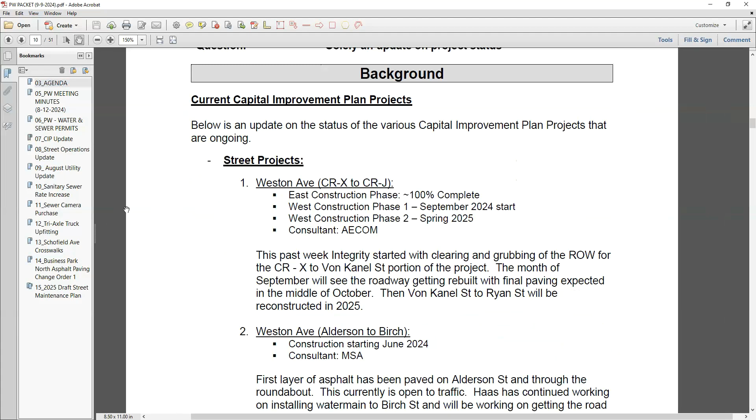Thank you. The staff report, item 7, CIP update. Michael? I'll try to keep it somewhat brief. The Weston Ave Village Project from X to Von Kanel is underway. Integrity Grading, their subcontractor, started the tree clearing and grubbing last week. They'll continue that this week, with probably some pavement removal starting towards the end of this week. So that half mile from Von Kanel to X will be done this year, and the rest of the way from Von Kanel to Ryan will be a 2025 project.

Weston Ave, Alderson Street to Birch - that should be completed. He's going to do everything there: pavement, final pavement, striping, everything. There's no water and sewer work there, so it's really just rebuilding the road and regrading the ditches. The schedule for next year's project is as soon as snow melts, they'll get going right away - that's according to what they have, the whole season, for the most part, and it's a fairly good stretch.

Then the joint project with Rothschild - Tom mentioned the water mains nearly tied in at Birch Street. Road building is ongoing there between Alderson and Birch. Looks like WPS has some work to get a new gas main in. Is that starting next week? I talked to him today, actually - they'll be in on Thursday, it started. So Haas is pulling out their pipe crew today, and their grading crew is coming in tomorrow morning, and they're just going to keep working on the road here. WPS should start on the west side and then work their way to the east.

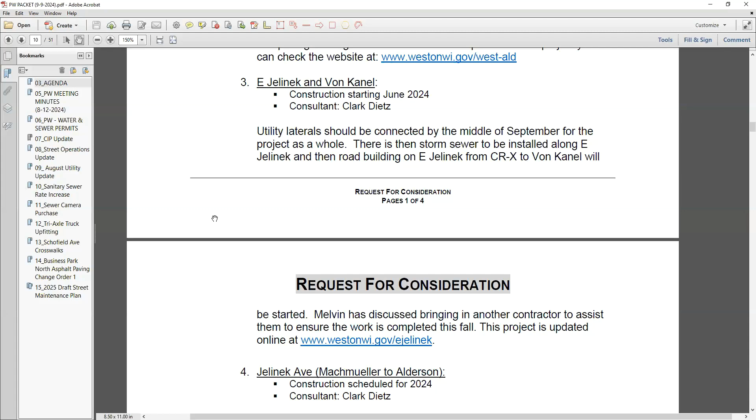East Jelinek, Von Kanel - that one's ongoing. Water mains in, sewers in, lateral connections are progressing from X heading east towards Kirk Street. Melvin will be subcontracting some of the storm sewer installs to McCabe Construction, and they're slated to be in here later this week to start the storm sewer. They're getting some additional help to get that project to the finish line before winter hits. The regular Jelinek that's paved has a few restoration items we're following up on, but for the most part that one's done.

We're getting close to 60% plans for Schofield Ave. Right now we're looking at an asphalt roadway going in and removing the concrete. There's an agenda item on the docket for today to discuss some of the location of pedestrian crossings - we'll talk about that one when we get to it in a little more detail.

What's the schedule for this project, Schofield Ave? Construction starts next year. We're looking to bid it in February, March, so the contractor can get going right away - probably March of next year, this coming year. So this winter we'd finalize plans and bid it right away, so that as soon as weather permits, we can get started on it.

I guess Fuller Street would be in the same boat. So we've got some preliminary design going on with Becker Hoppy. Ike's working on some of the stormwater aspect, and we hope to have, probably middle of next month, our public information meeting with the neighborhood on that one.

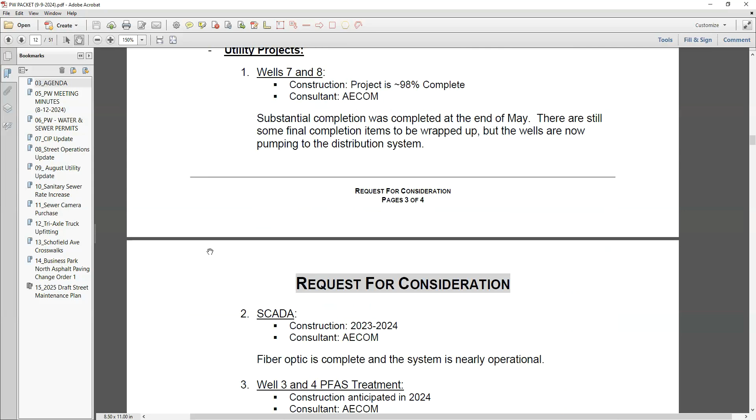So you said you use the water - we use the water right now. Correct, well 8 is running and we're using the water from it. Do you know how many gallons a day we use from that well? I don't, well, here, it's in your report. It's 6.8 million for the month of August.

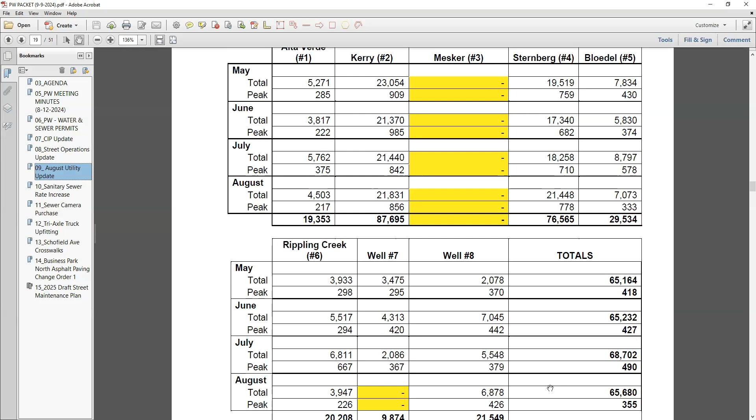And it's still good quality, what we find there in the design, so pretty much equal to what Bloedel Well is putting out, except for that downtime in July.

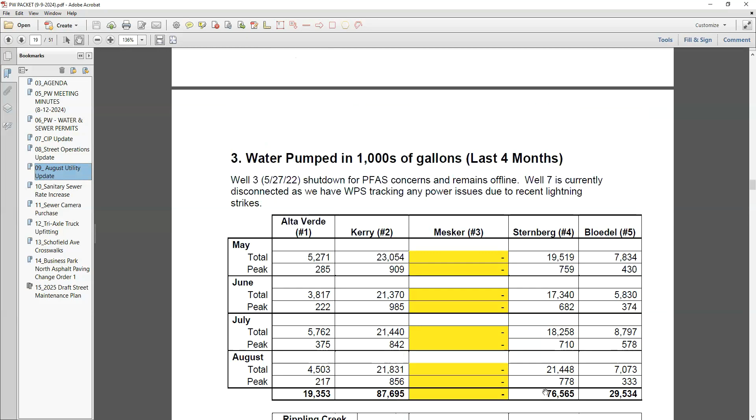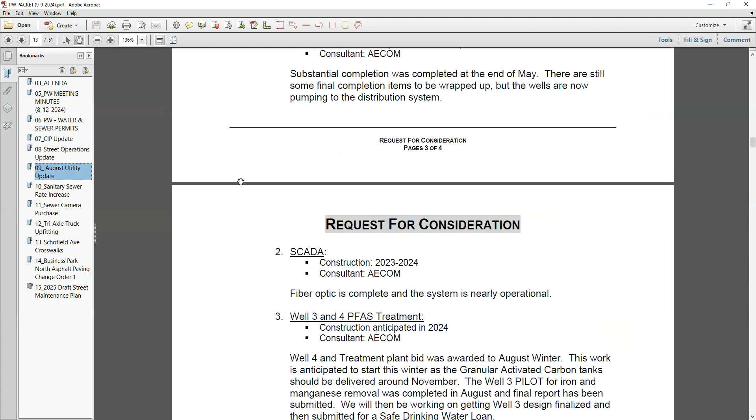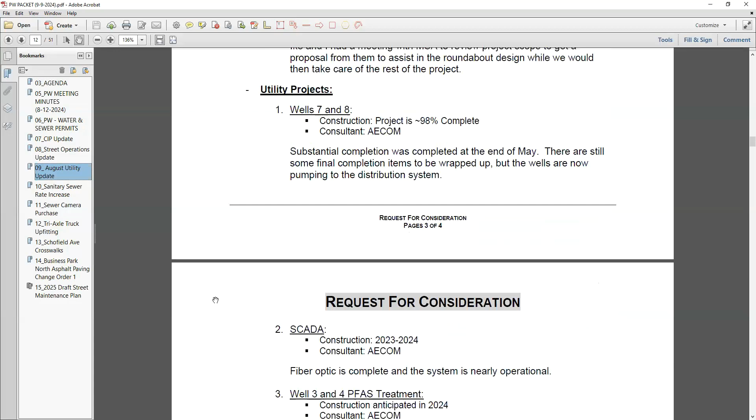Okay, is there anything else, Michael? Who's gonna talk about the wells and the PFAS? Are you handling that, Josh? Oh, the PFAS, yeah.

I guess I can. Well 4 treatment plant work, the granular activated carbon tanks should be delivered around Thanksgiving, is what we were told last week, so once they're here we can get going on that. And then the well 3 pilot for iron and manganese was completed, final report submitted, so now we can get going on our safe drinking water loan for well 3, since we have that information back and can justify to the DNR why that part of the project should be included with the emerging contaminants funding.

Ryan Street, that station? Yeah, we just have some site work left on the village side to finish up there, but the contractors are done. So later this month we should be getting Ryan Street graded and paved, and then Trotzer's getting some landscaping put in for screening from the neighboring properties.

Okay, and then Cedar Creek Interceptor, that's a lifetime project. I met with Catherine from MSA earlier today. We're still - Weston Ave is our number one priority for right of way, and that's kind of been the focus for the past year or so. We got another half mile, or quarter mile, of right of way taken care of this morning with a property owner, and hopefully we're nearing the end of the Weston Ave right of way, and we can then shift gears to working on this project. Any questions for Michael? You're gonna get later on.

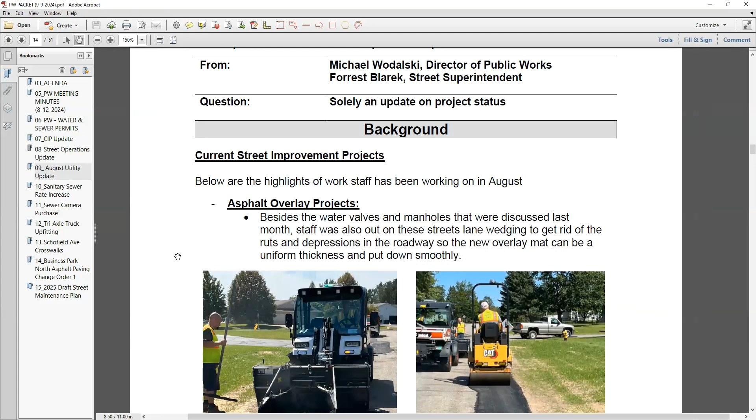Forrest street operation update. Item 8.

You don't have to follow along. You can just say whatever you feel like.

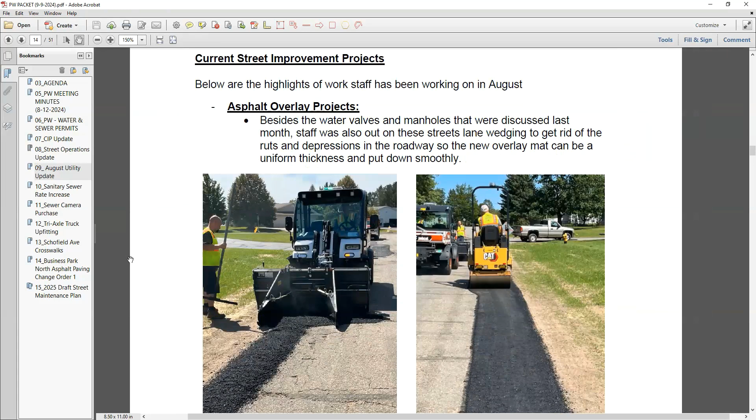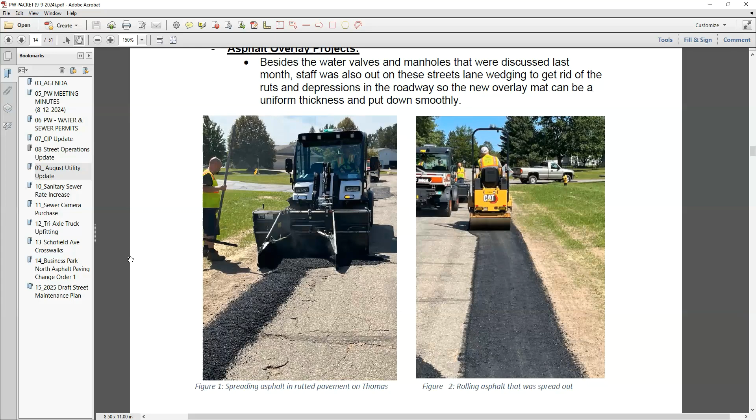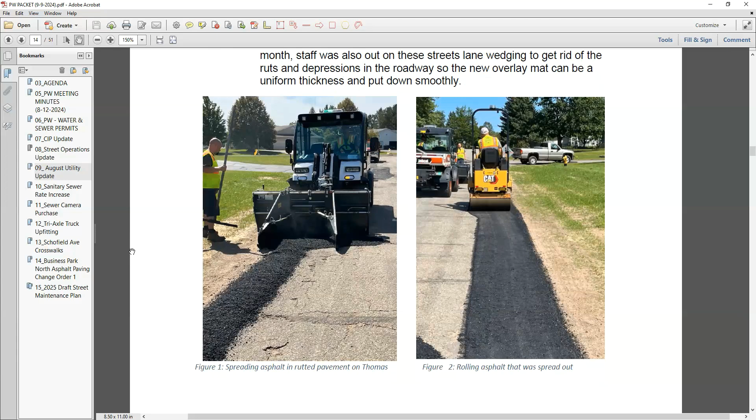Going ahead and putting the overlays that we had coming up from the neighborhoods listed. We got all our work done, we're waiting on RC Hayward to come in. They finished today in the Chadwick, Thomas County area, got the overlays done there. Tomorrow they're starting on their overlay project, then moving out to the Country Creek, Siberian area.

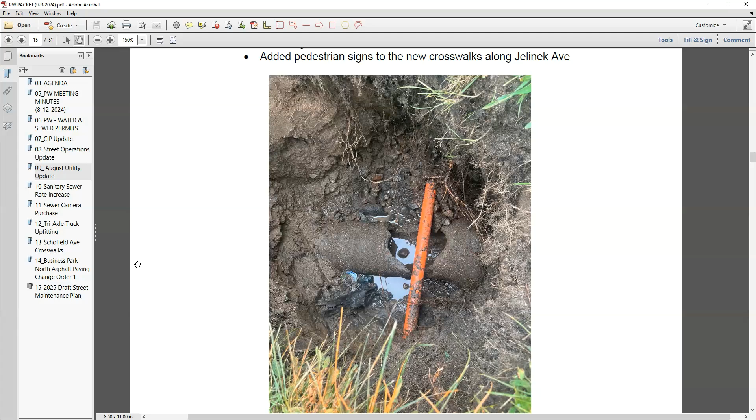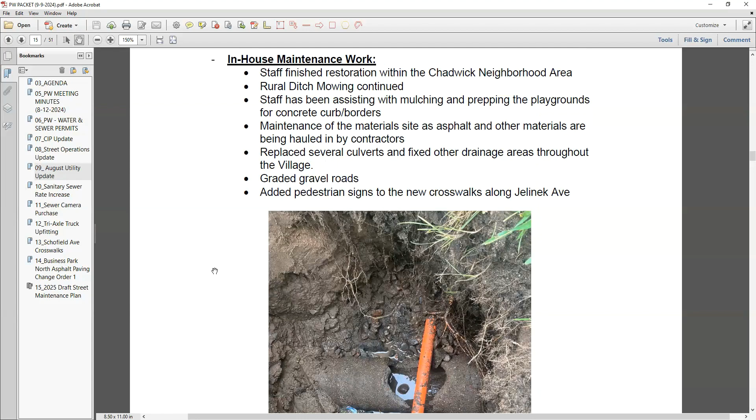This was an interesting one. I think anytime it rained, all of a sudden there was like a little geyser popping up through this person's front yard. So what is this pipe? That's a 4-inch pipe, what is it? That's a 6-inch, looked like an old storm sewer pipe. Don't know exactly where it starts from. It runs through this person's yard, but it connects into our storm sewer. So it must have been an old storm sewer in that area, up in Normandy foothill. So it's coming down the hill. I couldn't find where the inlet was on it, but every time it rained, that thing would fill up and just boil out of the ground.

So there's no wastewater in this place? No, that's for sure. So I see you repaired this, just have it there for that rainwater? Yeah, it's connected into our storm sewer. That's disconnected, yes correct. The TDS line is running parallel to our storm sewer, so this is perpendicular to it, almost at a T.

We had one of our crew members who formerly worked for County Materials concrete. He kind of came up with the repair solution on this one, using some wire mesh and almost rebuilding the pipe in place. It's nice having people with varied experiences being like, hey, I know what we can do here. So did he put rebar across and wrap the wire mesh around it? The wire mesh is wrapped around the actual pipe, then concrete over the top of the wire mesh. There is no rebar, no reason for it.

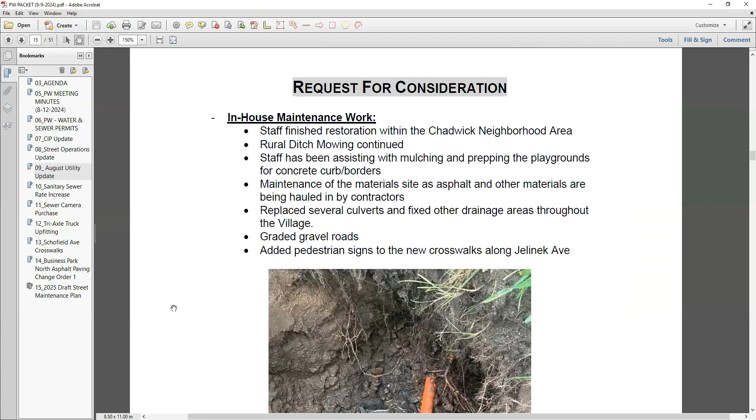All right, item 9, utility operation update, Josh.

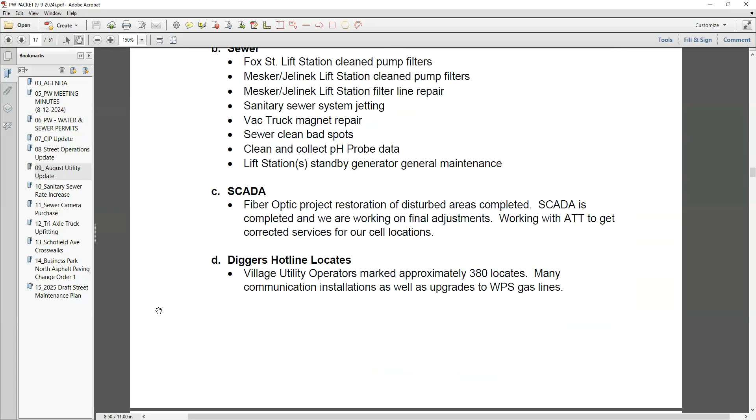Yeah, water side of things, a handful of kind of miscellaneous well repairs on some pumps and leaks. Michael touched on our iron manganese pilot study. I think we owe a meeting with Brian and the boys over at Water Surplus. We were supposed to do it last week, but we'll meet with them to discuss findings.

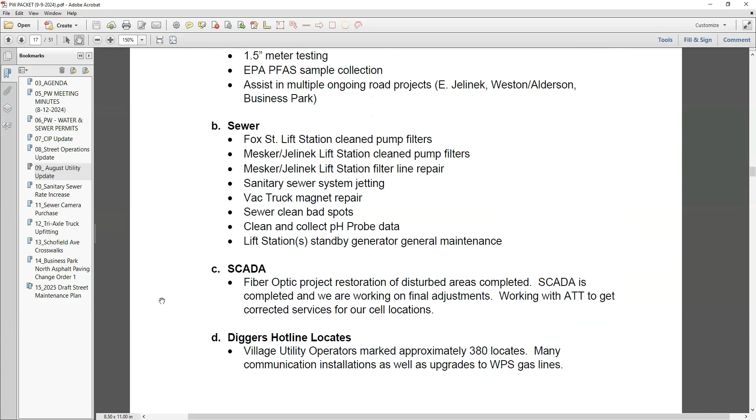We drained down and cleaned one of our towers over in the business park. Currently doing some measurements for our retrofit hydrants to get some of our 2 nozzles retrofitted to 3 nozzles. Completing some of our larger meter testing, continuing with some EPA PFAS sampling. Michael touched on most of the road projects that we have going on.

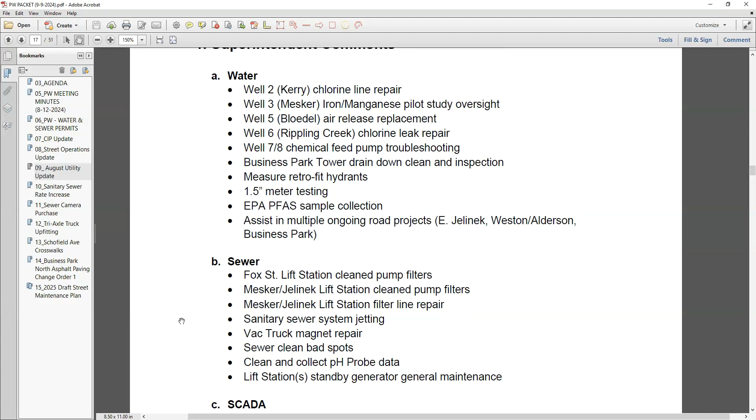Sewer side, some lift station cleaning, some general maintenance items. Sewer jetting is still going, hopefully approaching the end of that stuff. A couple other repairs as part of that cleaning for the Vac truck. Got up to some of our bad spots, continuing some pH probe data collection.

Fiber optic, our SCADA system, we're making some progress I think with our remote sites that use our AT&T. Apparently at the outset it wasn't set up with the correct business account, so then they had to reorder our SIM cards. We had to get new SIM cards, they had to build a new network. So we're actually discussing things with the proper people within AT&T so that we're part of a FirstNet communication line instead of just a regular business cell communication, the stuff that police and fire get.

So anytime there's an issue, we won't get slowed down, we'll be prioritized for any kind of issues that our remote lift stations are alarming out. So that's at least making progress. They said it should be a couple weeks. I don't really understand how things just take a couple weeks all the time, but they said a couple weeks.

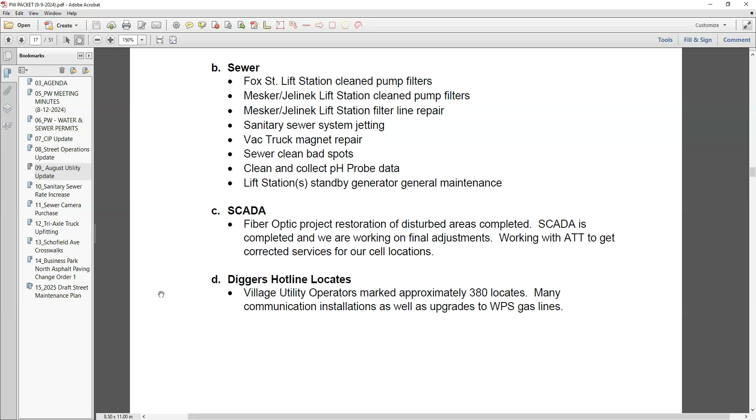Diggers tickets are still coming in. It's not a new thing, we're just trying to start up once in a while. No, I thought I turned that off. Work orders, a bunch of work orders that Stacy's keeping us busy with.

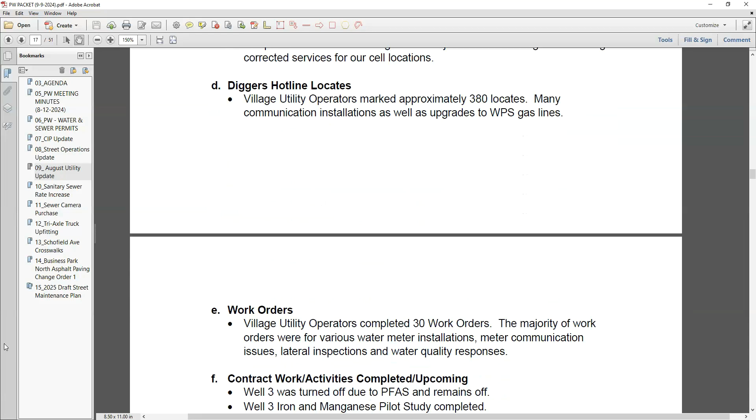The only other things: hydrant painting was completed, and I mentioned sewer jetting. Other than that, we have our customers, the water pumps, our lift station hours, and our wastewater flows.

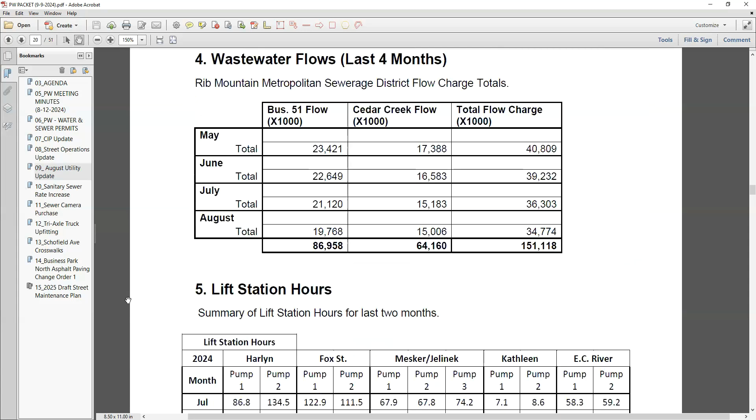Policy discussion and recommendation, item 10: 2025 sanitary sewer utility rate increase.

Last year, the Rib Mountain Metro Sewerage District announced they're going to be increasing rates for 2024 as they were taking on their phosphorus removal upgrades. I believe all of the neighboring communities, Kronenwetter, Mosinee, Rib Mountain, Rothschild, that also flow there, increased their rates last winter. We discussed taking a wait and see approach to see exactly what percentage would work, and we had some fund balance in the sewer utility, so it wasn't urgent that we increase it immediately.

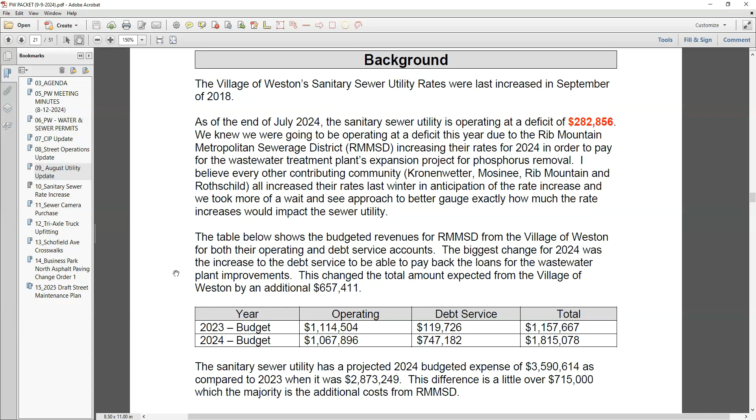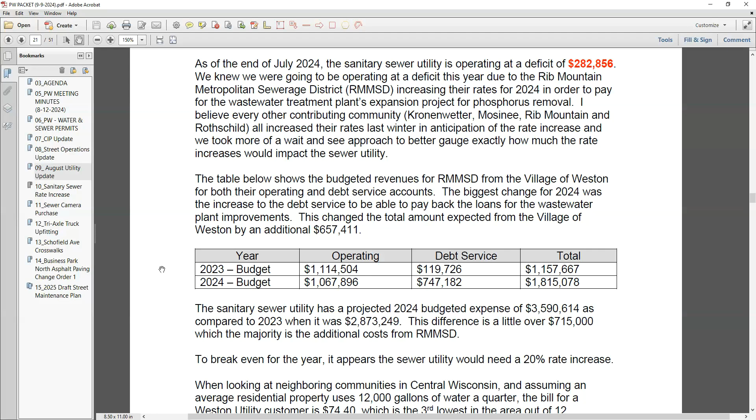Overall, it's about a $650,000 increase that Rib Mountain Metro is projecting for Weston in '24 as well as future years. They roughly needed $20 million, which equated to $1 million a year for their loan over the next 20 years. We're about 60% of the flow, so we get $600,000 in round numbers a year added to what we were paying. So we're running at a deficit of about $282,000 currently as of the end of July. Not quite $300,000, but it's also not the end of the year either.

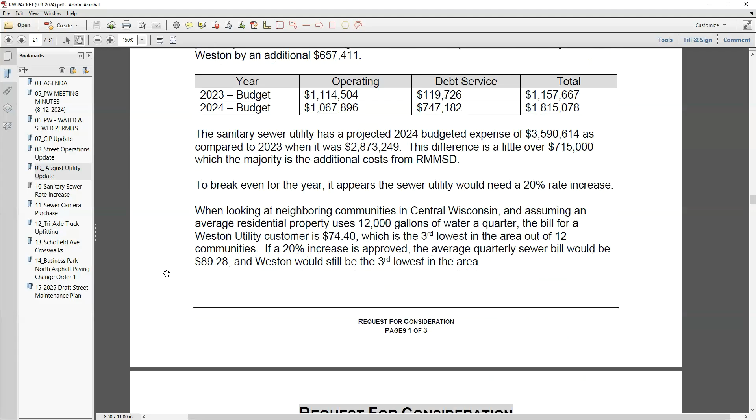To break even, it appears we'd probably need about a 20% rate increase. I usually look at what our neighboring communities are at. We're currently the third lowest, using a 12,000 gallon average residential bill. A Weston customer currently would pay $74.40. If you increase it by a straight 20%, that takes you to $89.28, which still puts us in third—we don't go to fourth or fifth, we stay where we are ranking wise. But it is about a $15 a quarter, or $5 a month, increase for a 12,000 gallon bill. My family of 4, we were about 16,000 gallons, so it might vary per family, but 12,000 has usually been what we've used historically as an average residential bill.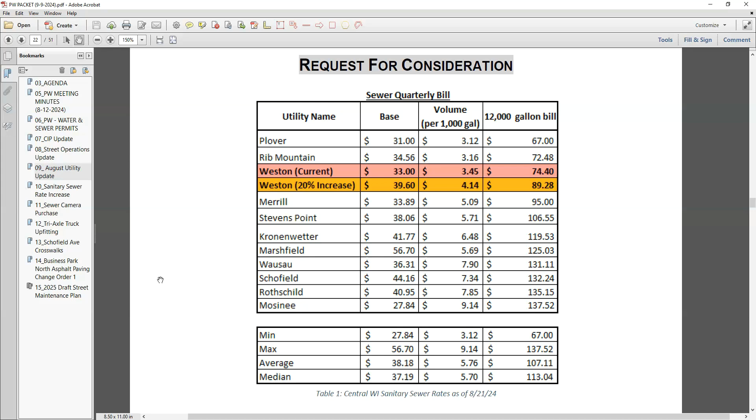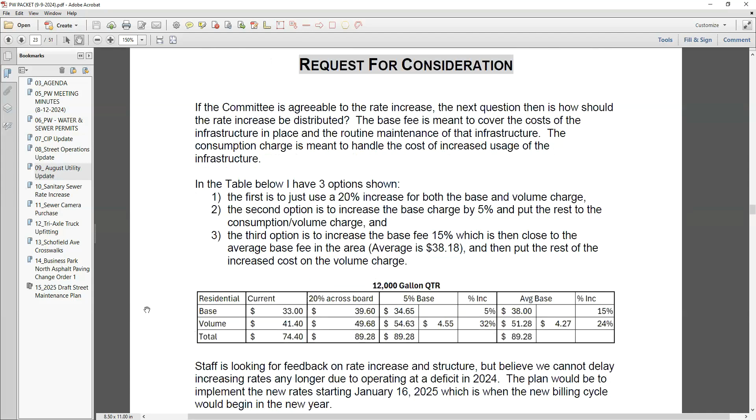Graphically, same thing. When we look at rate increases, there's always the question of whether you increase across the board—base rate, volume rates—make them equal, or do we keep the base rate at a lower increase and adjust the volume charge? For this one, the main rate increase is because of the cost of the treatment facility, which is based on flows, so maybe it makes more sense to have a larger emphasis on the flow rate cost versus the base charges. But we also haven't increased our sewer rate since 2017, so base charges for infrastructure costs have gone up—maintaining a manhole or a section of main has increased over the years too. So there's probably some justification for increasing some of that base fee, which is there to establish that this is the system you can use, and the more you use it, the more we have to pay the treatment plants. Hopefully I didn't botch that too badly trying to explain it.

So I had one option where you go 20% across the board. Another where it's a 5% base increase, which then is about a 32% increase on the volume charge—the average base charge was about $38.18. So if we take the base rate at $38, that's about a 15% increase there, and then the volume charge would be a 24% increase. So with that, I don't know—just curious what questions or feedback you have.

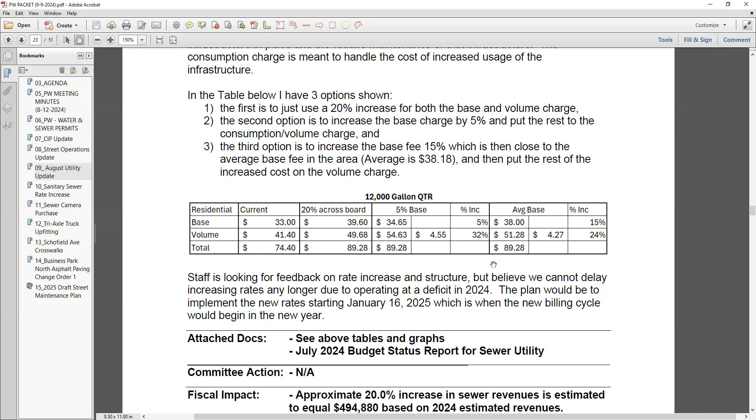So, what's your wishes? Unless there's more discussion here. I'm good.

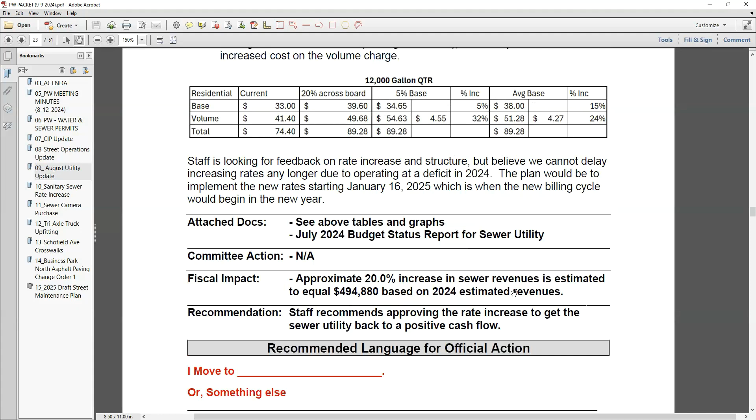I don't know if I actually put a motion in there because I wasn't sure what anybody would say. I propose the base one.

I'll make a motion to increase by 20%, including 5% base fee and the remainder to be on usage fee.

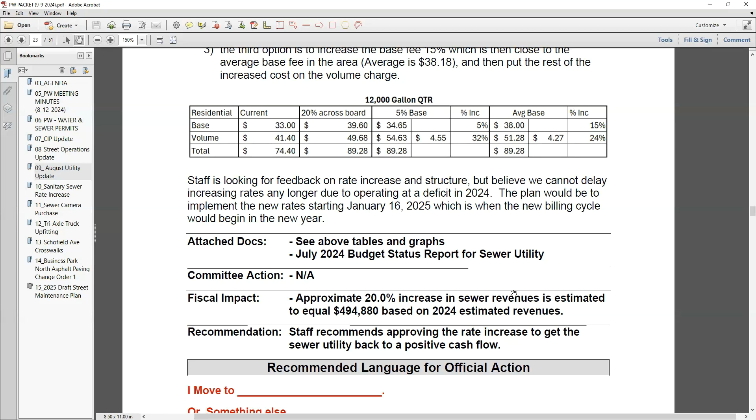Is there a second? I'll second.

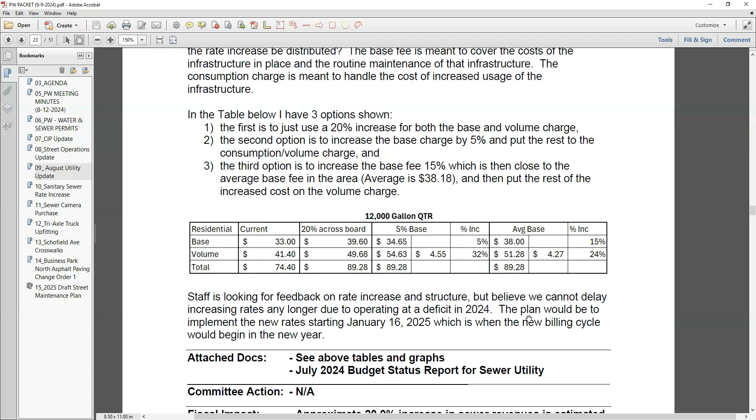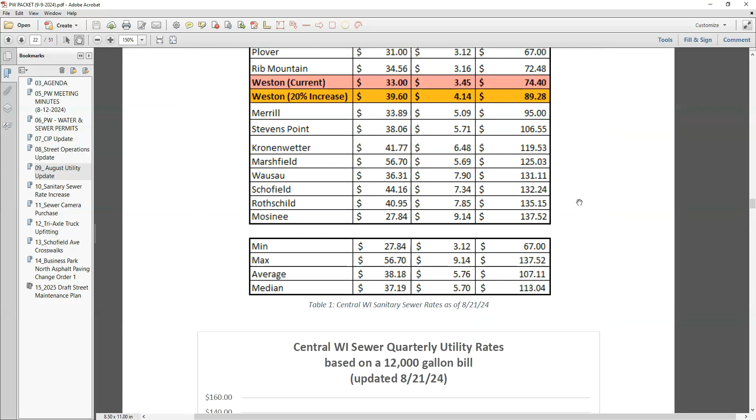Discussion? Does that make sense, Michael, what we're proposing? Yeah, it's the middle option here. So the base fee on a residential house, which is what these are based off of, would go up to $34.65, and then the volume charge would be $4.55 per thousand, where we're currently at $3.45. So the usage charge would go up $1.10 per 1,000 gallons.

The system's supposed to work based on the user fee. If you use 100,000 gallons, you gotta pay for 100,000 gallons. Using 10,000 gallons, you pay for 10,000. So I think it's just a fair system, as we should.

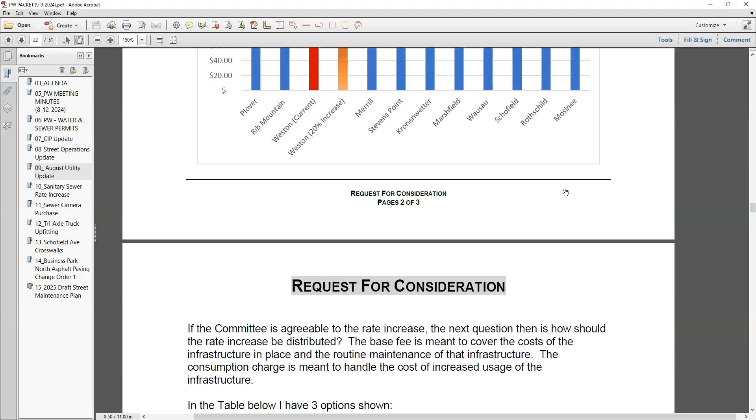If there is no other discussion, all in favor, signify by saying aye. Aye. Opposed? I have it, thank you.

Okay, item 11, replacement sewer televising camera. Do you have a picture of this?

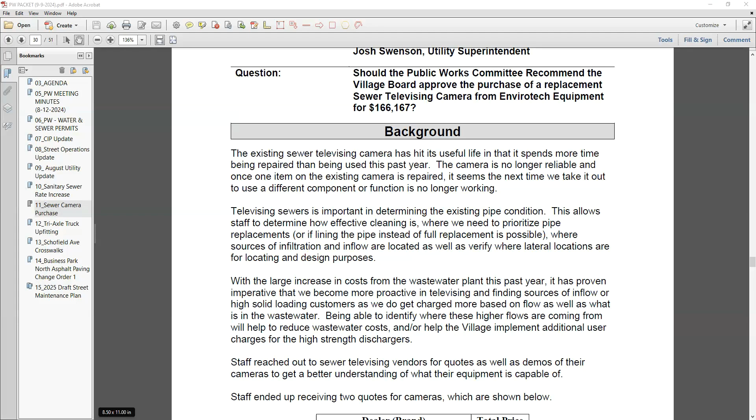I don't, I can quickly grab a picture of it. Let's see what kind of camera. Nothing ever loads when I want it to. Oh, picture here. I was trying to see, I thought one would pop up there, or I'll just go to their website.

So we currently have a 1986, I think it's an old bread truck, that we have our current sewer camera in. With our latest utility van replacement, we put the camera system in one of the utility vans we're rotating out, and put it in that one instead. So it'd be in the back of a Ford Transit instead of an almost 40-year-old vehicle that doesn't steer well or have good brakes.

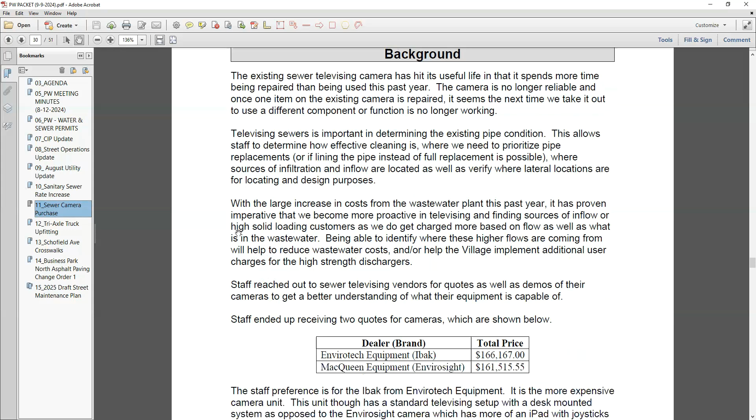So we pay 5,000 extra just because they like it, or is it worth it to do that? Yeah, why don't you explain it. It's really the controls, and the fiber optic cable versus a coax cable. The guys thought it was built stronger. And just talking to other municipalities or sewer utilities that have this brand, and the other one we got a quote on, and some of the others, they just felt the service and reliability of this camera would make up for that difference in cost.

There's also the lifting pole, and the way the crane is located, they're not bending down having to lower it. They can lower it with a built-in winch. I'm sure we could get a winch on the other one, but that's an extra cost not quoted. The other one is manual, you have to drop it in. And manually, you run the risk that if you've got slippery gloves or something, you drop it and there goes your camera face first into the bottom of a manhole.

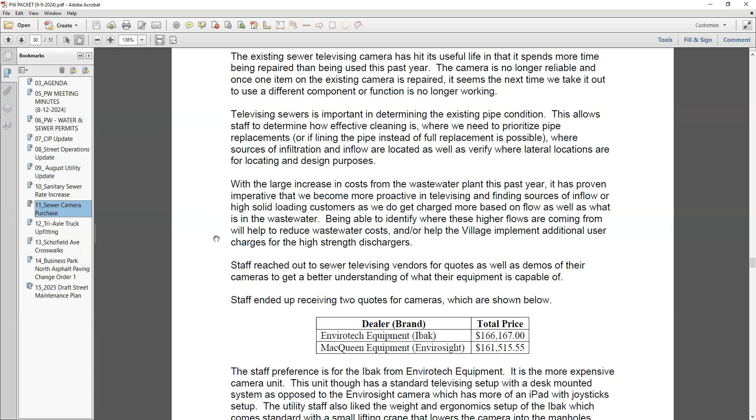Anything else? What's the existing camera, what brand is that? It's an Aries. It was the brand that Envirotech carried at the time, so Envirotech no longer carries that brand. I'll say they chose to stop carrying the brand, I guess. So it wasn't really a way of planning.

We should give our money back to everybody. Our existing camera is probably 8-9 years old, and it doesn't operate in ideal conditions, so I think it's probably about at its lifespan. So then what are we gonna do with that old one? We can try to sell it. I'm sure somebody out there will buy it, or put it to work. Okay. Sure, any question?

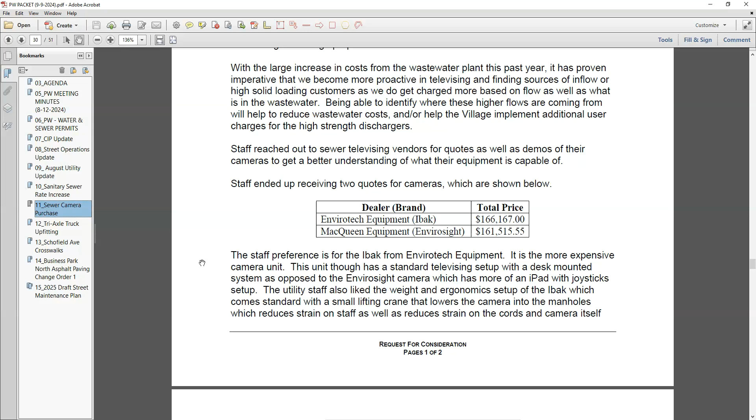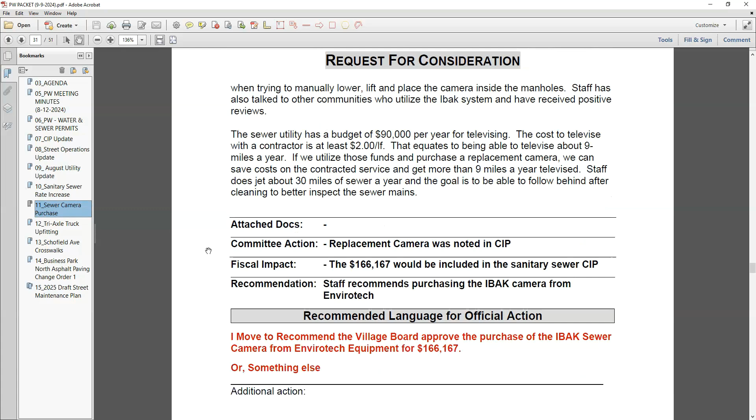I'll move to recommend the board for the purchase of the IBAK sewer camera from Envirotech for $166,167. Is there a second? I'll second. Discussion? No discussion. Please signify by saying aye. Aye. Opposed? Thank you very much.

Item 12. Tri-axle truck upfitting. Yep. So roughly a little over a year ago, we approved a replacement plow truck, a replacement swap loader truck that would replace several of the existing trucks in our fleet.

Finally got a build date on that truck. Apparently if you have an Allison transmission, they're not just flying off the assembly line right now, so everything was backed up about a year. So now we've got a truck that should be getting built over winter, and we got quotes from 3 of the local truck builders to, once that chassis gets delivered, put the swap loader system on it and get a plow wing and V-box, all associated hydraulics. The rest of the attachments we have currently, like the leaf vac, the snow boxes, the dump boxes, the flatbed attachment, would all be interchangeable with this truck, as well as the 2 chassis we currently have with that system.

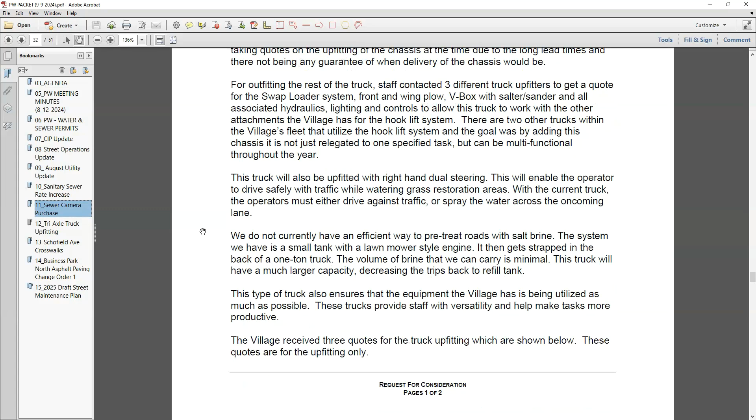So this would include the dual right-hand steering. For leaf pickup we use the right-hand steering, so the operator can see what they're doing outside their door. And I guess we'd be adding the pre-treatment tanks for the salt brine, since we don't have a high volume tank at the moment to do that.

So we did get 3 quotes: Truck Equipment, Scott's Heavy Truck, and Monroe Truck. Monroe Truck was the lowest, but the staff recommendation is to go with Truck Equipment. The main difference is Monroe uses only Monroe plows.

They don't put on universal plows, which all of our other plow trucks have. So our mechanic staff prefers to keep everything the same for parts inventories, and if a chassis is down and another truck is available, you can hook up to that other plow and go, instead of having a custom plow for just one truck. Or even if this plow had an issue, you could grab a plow from one of the other trucks if need be. By having that versatility in the fleet, you're not reliant on one small thing putting a whole piece of equipment down for the day.

What about the Scott? What's the Scott for? Scott was 264, versus Truck Equipment, which was 248. Scott's and Truck Equipment were the same equipment, same brands, but just higher labor cost - some of that is factored into their quotes.

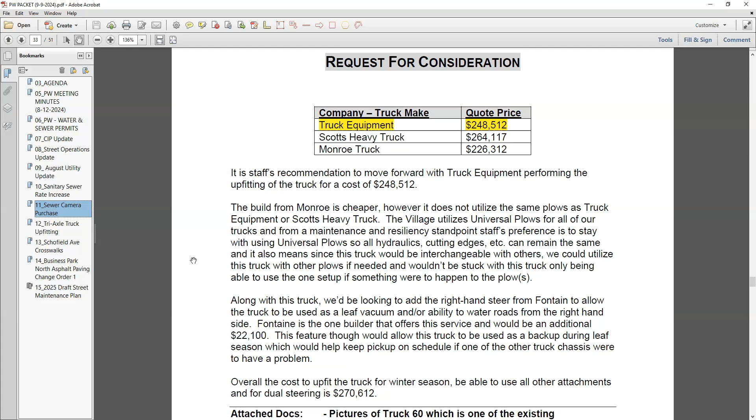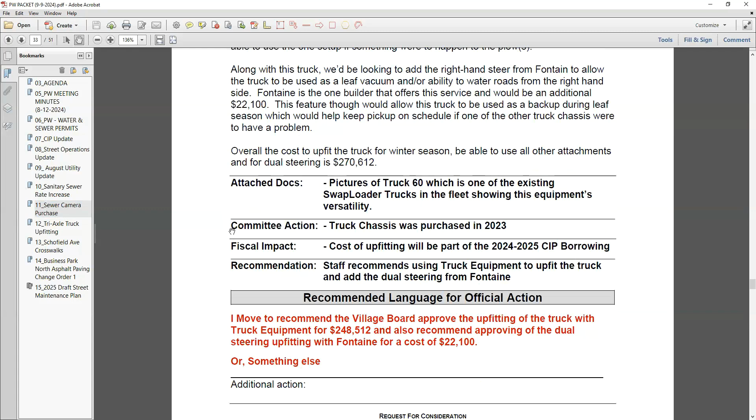Staff recommendation is using Truck Equipment to upfit the truck and add the dual steering from Fontaine. I'm going to recommend approval for getting the truck from Truck Equipment for $248,512. I'm also recommending approval of the steering upfitting with Fontaine for a cost of $22,000.

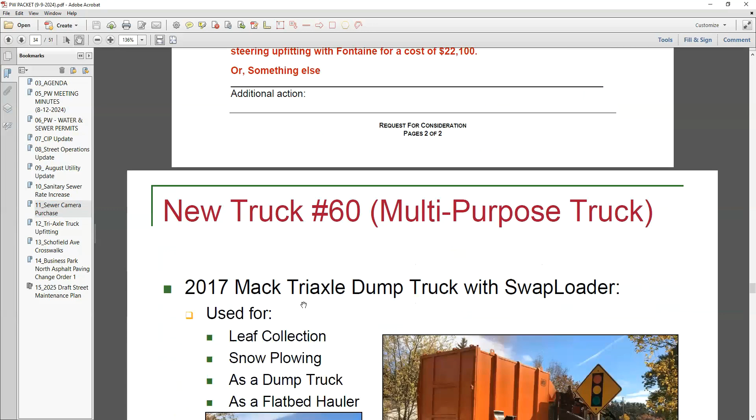Question - so that $22,000 is extra to the $248,000? Yeah, so that takes it to about $270,000. Fontaine is the only place we can find that provides dual steering anymore. Monroe used to provide it, but they no longer do. So if we want dual steering, that's the one place we need to go.

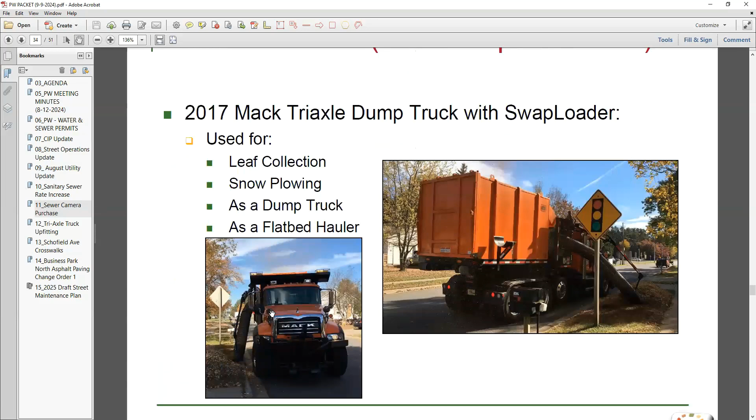And then I guess, yeah, so the total is $270,612 - I should add that in there. Do we mind adding it? No, just amend the motion to say a total cost of $270,612. Yes.

So first we're going to move, vote on the amendment. All in favor of the amendment, signify by saying aye. Aye. Opposed? Now we vote on the original motion. All in favor, signify by saying aye. Aye. Opposed? Thank you.

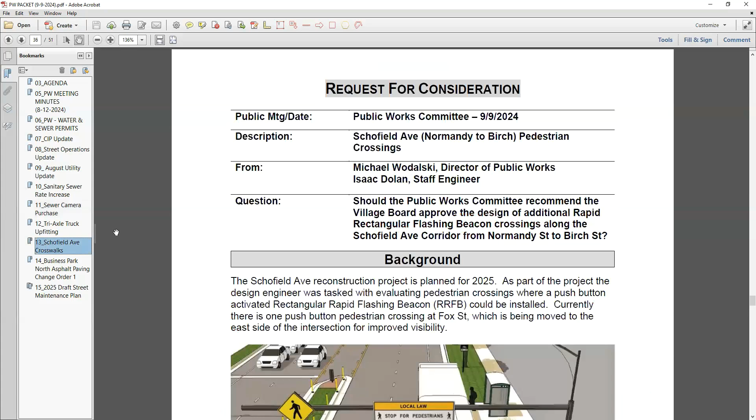Item 13: the Schofield Avenue, Normandy to Birch Street, pedestrian crossing location.

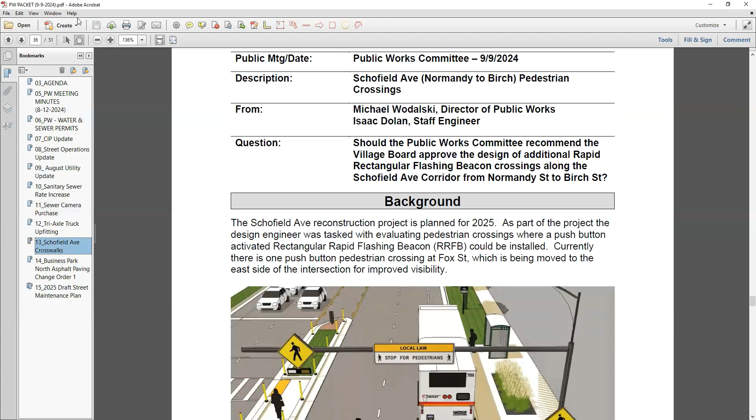Can you bring that map up for us? Yep, so as part of the Schofield Ave reconstruction next year, it was discussed in the proposals and in our TIF project plan and Schofield Ave corridor plan about improving pedestrian crossing through this corridor. We have 3 signalized intersections at Alderson, near Target and Ace, Pick and Save, and at Birch Street. We currently have one push-button activated crossing at Fox Street, but those posts are more or less hidden by elm trees currently. So we're looking to add more of the trombone-style mast arms for the rapid flashing beacons at some of those unsignalized intersections.

Fox Street we propose would go back in place, and then the question really is what do we want to do between Normandy Street and Alderson - is it one crossing in the middle? We have three proposed locations. One's right at Normandy, the second is kind of right by Wiggly Field, a little east of Pine Street, and the third one is somewhere in that Cutoff Road, Cherry Street, Willow Street area. And then the fourth one is Fox Street, but that's existing and we'd just put that back with better signage.

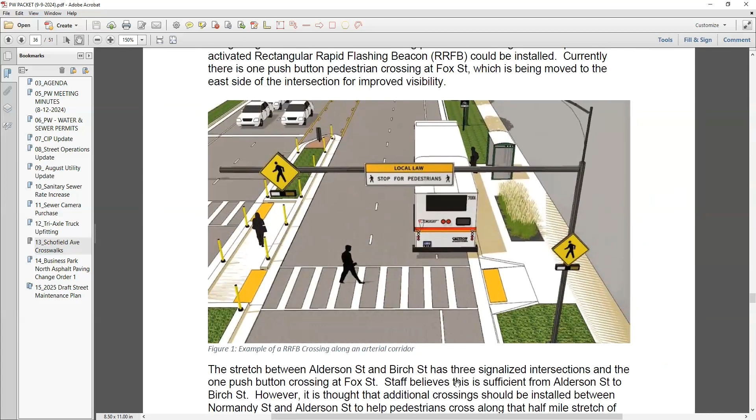Or you just activate both sides right away. I guess both of those are options. Probably both sides right away.

Okay, and then the other one, you've got them at cutoff road. You get the cutoff road they use for coffee - people go to that coffee place. Caribou Coffee, is that correct? Caribou Coffee is right there, yeah.

Yeah, that's the only one I'd like to see move, because I know that traffic out of them could be a lot, depending upon the time of day. At noon they're busy, and also in the morning they're busy, and at the end of the day.

Are you talking more like, is it better to have it right near it or have them get a chance to accelerate? Yeah, so I guess that's probably a good point too - crosswalk is right there, they see the flashing, don't turn, otherwise you turn.

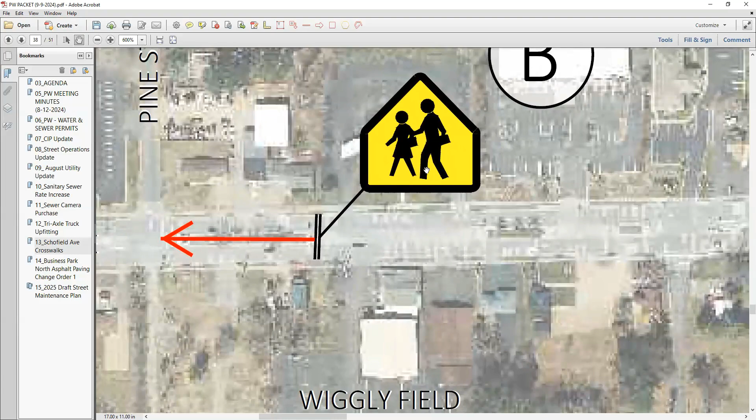And if you like the way it looks, just moving Pine Street, I would say it's getting more used by those people in the back there.

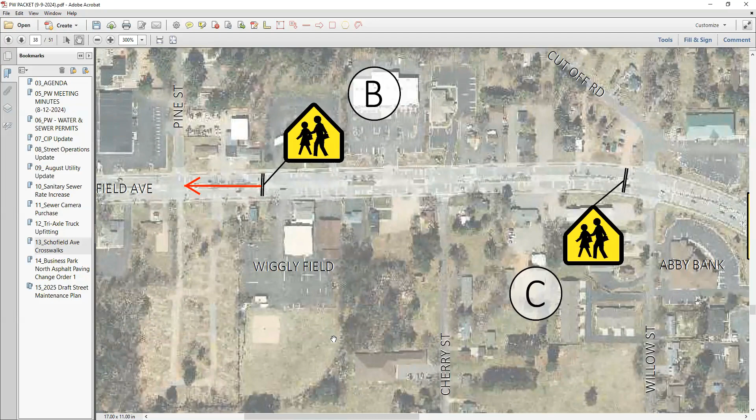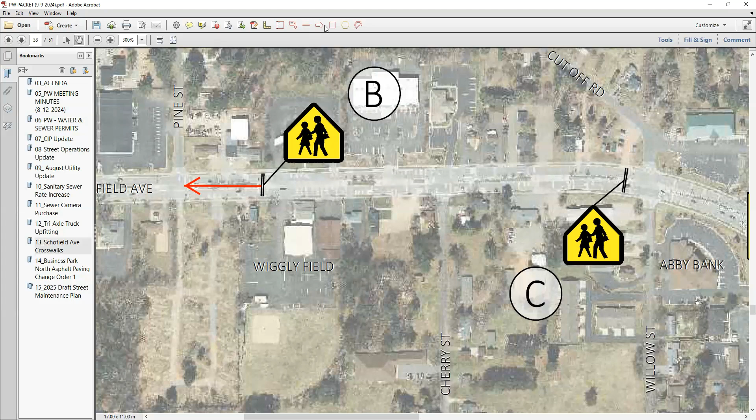I mean, is the cutoff road one good, or is that maybe one we try to move west a little? We can go closer to the other one, maybe move more to the west of that. Look at moving this more, because really that you're way not very far away from Alderson here.

How about we put them right in the middle between Alderson and Pine? Yeah, that was kind of the thought here. So you're thinking something...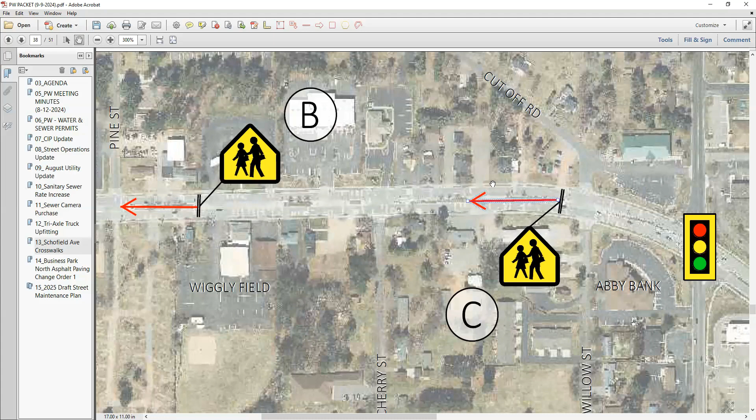Then the access points for the firehouse, all that's right there, it's gonna be right in here somewhere. You see that parking fracture in there? Yeah, I'm not sure people walking through that parking continuously, where they go.

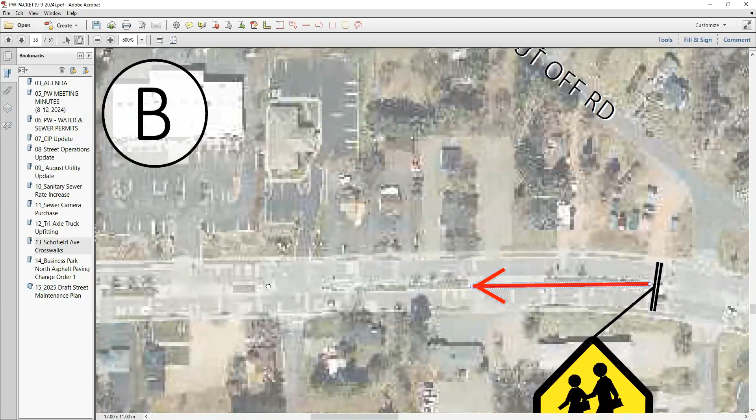But I have seen quite a few people coming from, going through the traffic from cutoff road on the back, north side of that. They cut through that chiropractor parking, from the north side or the south side going north. Yeah, they go through that parking and they go to the backside. There's apartment buildings on the backside on cutoff, and if somebody maybe lives on the south side of Schofield Ave and they work at Greenheck or Merrill Iron and Steel, that'd be a way to quickly get through there without having to go all the way around.

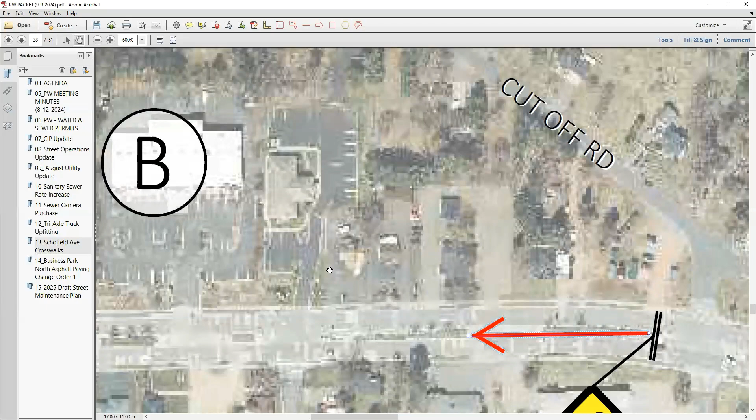Yeah, it's a cut through to cutoff, big speed bumps in there, so maybe it's better to move a little bit more to the west. Okay, so try to move this one west, closer to Cherry Street here.

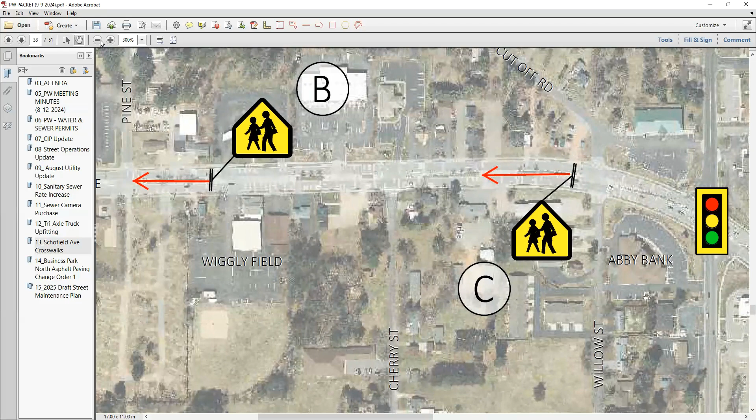And then move this over to Pine. Cherry Street's here, it's currently by Willow, so we move that closer to Cherry. And then move this one back to Pine Street. Okay, and you kind of stay almost equally spaced.

And then I guess the other question is, at any other crossing, would we just remove those crosswalks to try to discourage people, or do you still leave a crosswalk, say at Pine Park here?

I know, if it is like that, people don't stop here. In the bigger city, you stay on the curb, people stop. In here, when they see you're on the curb, they speed up.

I would eliminate it myself, just funnel people down to the beacons, direct flashing people to the beacons. Then people that are driving are gonna be used to, this is where they'll be crossing, instead of having other ones come in between. If somebody wants to jaywalk and cut through those, it's not like they have to. I guess people aren't gonna use it.

I'll use an example of something I see quite often. If you're driving in the city of Wausau, there's a really nice flashing pedestrian crossing right by the police department and the apartment building there. And just up the road is a Kwik Trip, and people cross from Kwik Trip all day long instead of walking down to the lighted things. So it is difficult to try to force people to go where it's safer.

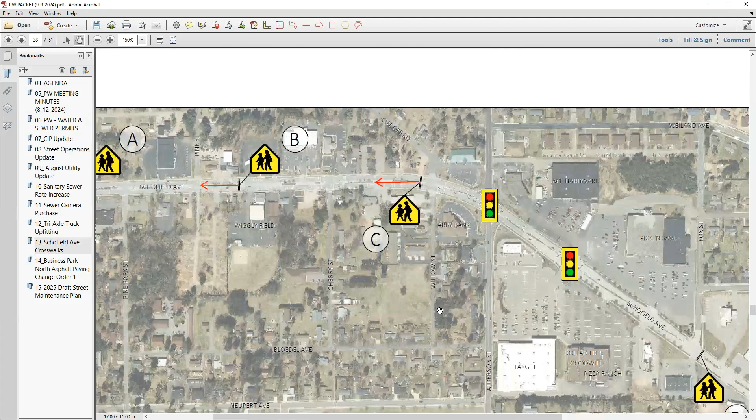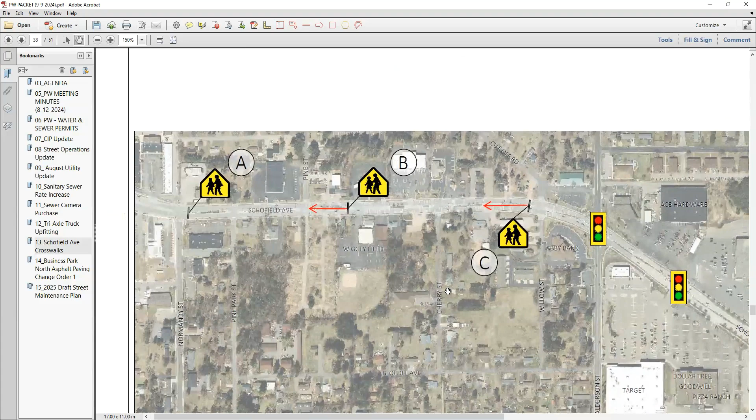All right, anything else? You're good with it? So what's the final decision, or recommendation? I don't think I put anything in there for any specific language, just trying to get an idea. So we want Pine, Cherry, and Fox. Yes, you got something in here.

I'll move to recommend adding RRFB signals at Pine, Cherry, and Fox Street locations, roughly, and elimination of Normandy, and probably elimination of the rest of the existing crosswalks, removing the existing mid-block crossings. And we're gonna make sure all the stoplights they do have are getting upgraded, so we'll make sure that's a part of that.

I'll second that. Any other discussion? All in favor, signify by saying aye. Aye. Opposed? I have it, thank you.

Business park north, change order number 1.

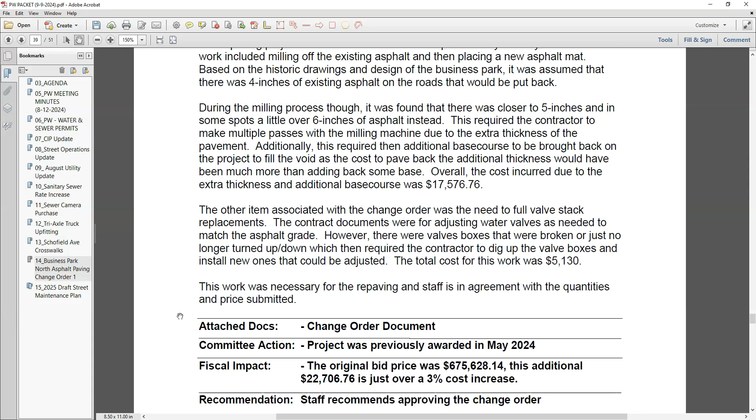Michael, did they do coring for this project before they started? No, we didn't. Okay, they should be done — anytime there's a pavement replacement, they should core the pavement to make sure what we estimated is correct. The other thing is, was it 5 inches or 6 inches through the whole project, or just a specific area? It was at least 5 inches throughout, and at intersections I think it was in certain sections — Commerce and Technology Drive.

Because some areas could have heavier truck traffic, and 5 inches for that area isn't unusual given how many semi-trucks go through. We were just using the design drawing for the business park, which showed a typical of 4 inches, so that's what was estimated for.

So when they came back and the mill didn't get through all the asphalt, they said, what do you want us to do? We told them to make another pass and get it deep enough, then fill it back in — we had them put base course back in because it seemed more cost effective. So you didn't wait until the end of the project? No, they did it as it was happening, right away. But I think it should be cored — that blacktop has to be cored in more than one place. Yeah, and we'll make sure we do that moving forward.

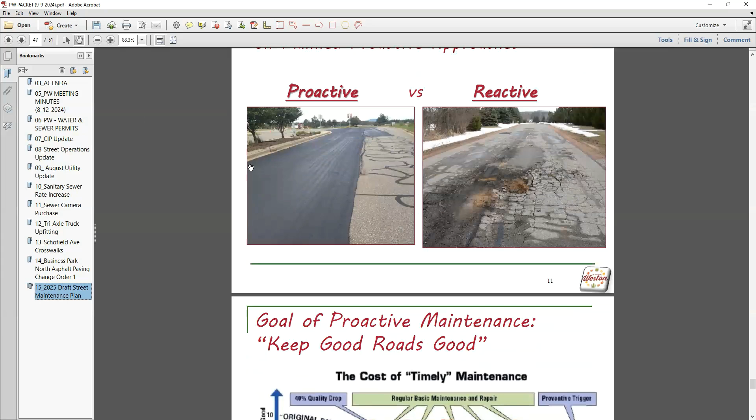So a little bit village-wide, we try to touch every quadrant so that we're keeping up on our pavement repairs and keeping good pavements good. If we can treat a pavement with a spray or some type of preventative treatment, it helps the longevity, increases the life of it versus just waiting for it to blow up on us and then we're reacting to it.

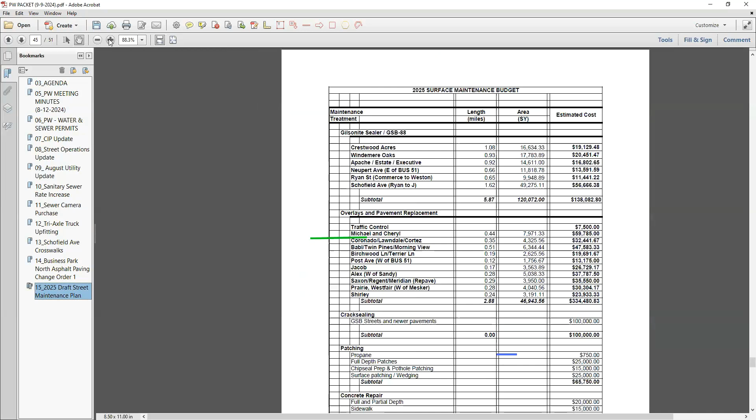So we try to always balance being proactive with our maintenance versus reactive to the worst streets out there. That picture you got in there, the pavement shouldn't get like this at all. It's not acceptable. This pavement should have been repaired 3 years ago before it turned to this. That was a picture of a street in the springtime when it finally gave loose. I'm not gonna lie, we have pavements that are probably one bad spring away from looking like that.

That's where the repaving projects come in handy. We're trying to get ahead of that so we are taking care of it. But I could go show you 10 or 12 segments of street right now that look like that throughout the village. It shouldn't be like that, those should be number one to fix.

Well, so that street, if I told you it's between a quarter and a half mile long and it's got 4 houses on it, does that make a difference versus a Schofield Ave that has thousands of cars a day? Those people pay tax too. They are citizens of this village. You should treat them the same as you treat everyone.

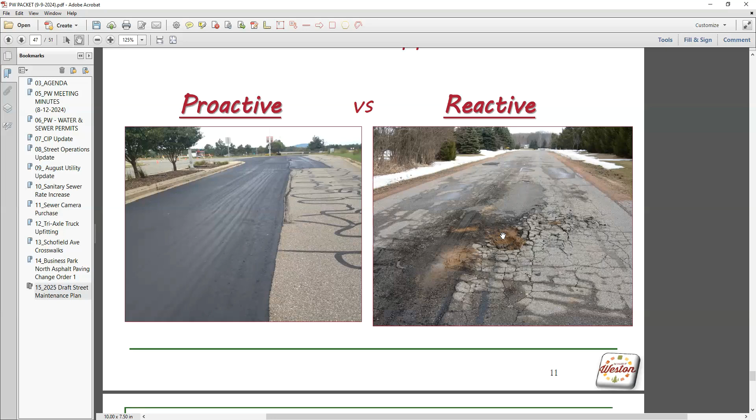Yeah, historically we've taken the approach that our arterial and our collector streets are priority, and we keep them at a higher standard than the local side streets. And a ton of asphalt costs the same no matter what street it's on. So it's that balance, if you look at the map of what we're trying to do.

There's definitely streets on there that, unless you live on it, like Shirley Avenue, you're not driving on unless you live there. Shirley Ave looks like that picture if we have a bad one, most of it, not all blown up. You can drive on it, but you can probably take a stretch of it which is the worst, and do the full job on it to make sure it is taken care of, and then do the rest of it.

So there's more than one way to skin that cat, more than one way to do it.

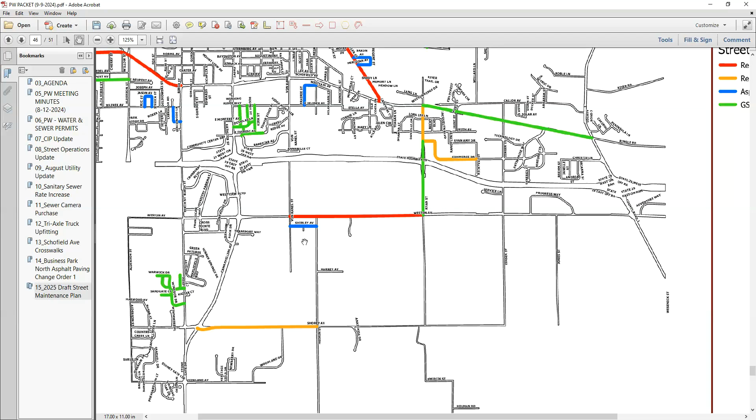Yeah, and in our patching here we always have about a $25,000 budget for full depth patching for asphalt streets. Birch Street south of Kwik Trip, we did that 2 or 3 years ago, kind of south of Jelnik. There were a few rough patches, so we do that.

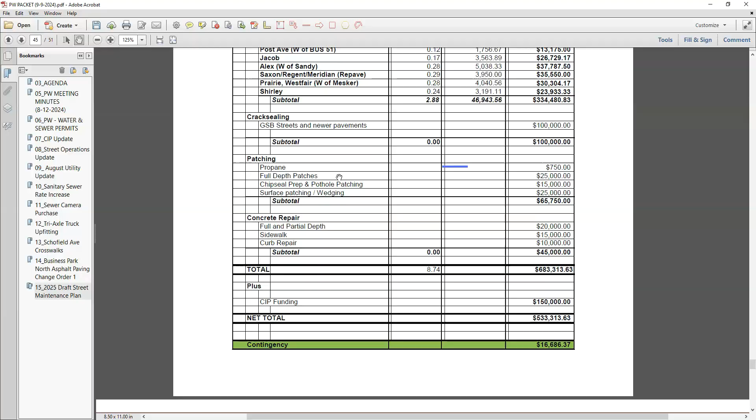Where it's all kind of wavy, we just don't have the ability to go do the whole street right away. And that's where we've talked about, we had about an 8-year hiatus of really doing a lot of street work in the village, and that's kind of catching up to us right now. We're doing a good job, we're getting a lot of miles paved, but we went about 8 years where we didn't pave miles of road. So we're trying to catch up and take care of what should have been done historically, plus what we should be doing right now.

So we do that. If it gets to that point where clay is busting through the asphalt, we definitely cut that out and take care of it. But we shouldn't get to this point. I just can't see that. Well, the goal is to always avoid that in areas.

Yeah, it's kind of like snow plowing. When people say I have the worst road in the village, I generally say I hope you think you have the worst road in the village. That tells me we're doing a pretty good job everywhere else. Just like everyone who says I get plowed last, it just means we're plowing the right roads first. So I try to look at it optimistically, that hopefully it means we're taking care of the roads that should be taken care of. But Luis's neighborhood looked kind of like that until we got around to reconstructing it.

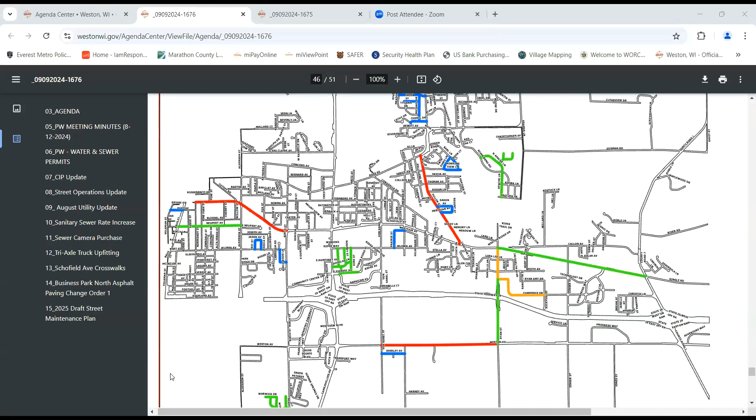Other questions? All right, next meeting Monday, October 14th, 2024. Do we need to move on that one, Shane?

I don't think so. Same thing. Oh, technical problems. I mean, unless anybody has questions, I guess that's kind of what we're looking at implementing here in 2025 for next year. It doesn't help you out at all. Okay, you're right, I'm sorry.